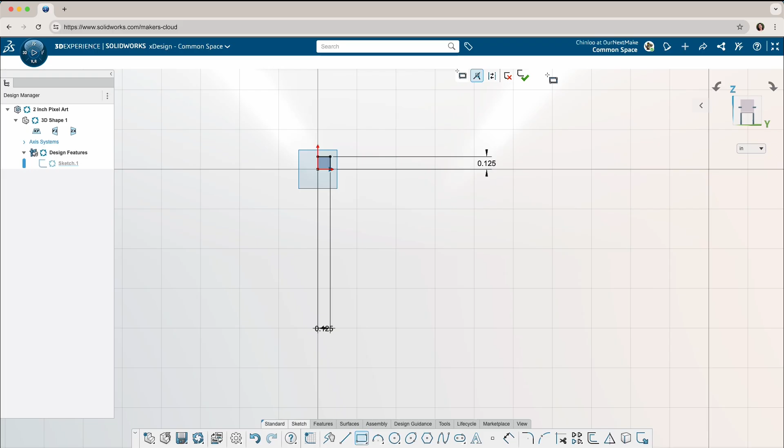I begin by making the first pixel block. I sketch a small 1/8 inch square. Then under the Features tab, I choose to extrude the square into a cube.

Now I can create a grid of blocks using the linear pattern feature. I adjust the spacing to keep the blocks tight together. 16 rows by 16 columns will make a perfect base plate.

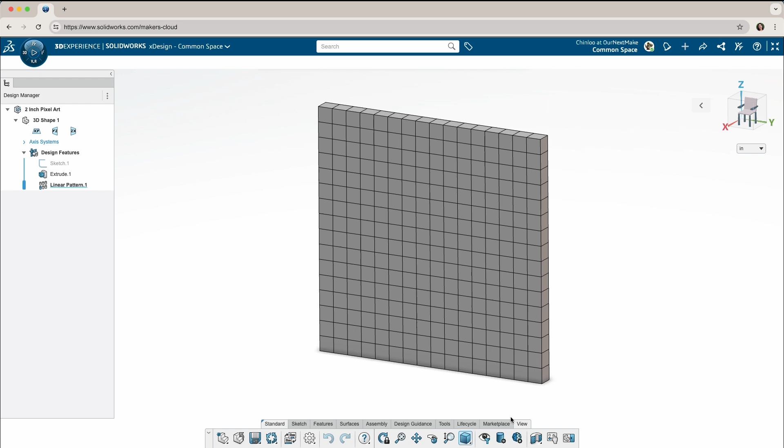Finally, I make sure to switch to body selection and uncheck Merge Results to keep each block separate so I can apply the colors on individual blocks.

From this 16 by 16 plate, you can either save a copy or make a revision of the original model. This way we can change things up and not affect the original 16 by 16 plate.

To get the pixel character shape, I open up the linear pattern dialog by double-clicking the feature in the Design Manager tree. At the bottom of the dialog, I expand the Advanced section and check the Skip Instances option.

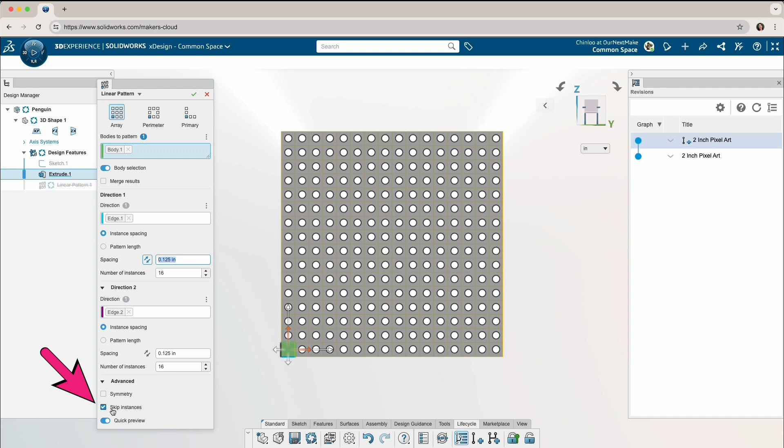Now you can toggle the dots in each block to turn it on or off to get your shape.

With the shape set, I turn on Color under the Tools tab of the action bar at the bottom of the screen. I select the faces I want to color and pick the color I want.

Now I can get a sense of what I'm looking for in the design.

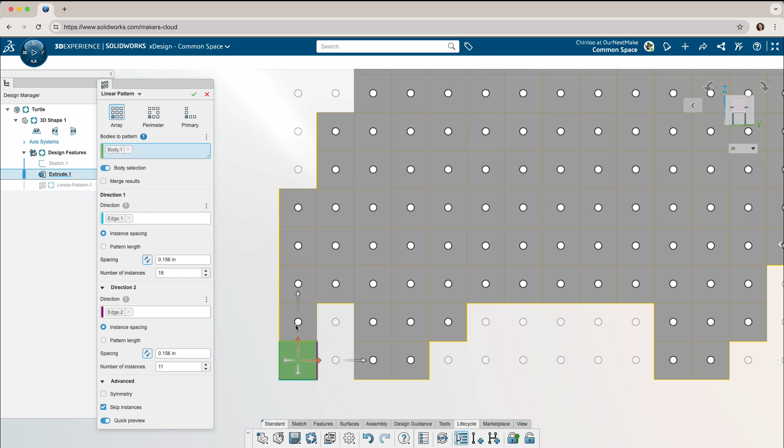If your shape doesn't include the original corner block, there's a trick to addressing this. The corner block is necessary to maintain the pattern, so it can't be toggled off.

However, I can go to the Features tab and choose the Delete Body tool to remove that unwanted block after the pattern is made. Ta-da!

Now, if you are not able to 3D print in color, I have an idea for how you can add color after the shape is printed.

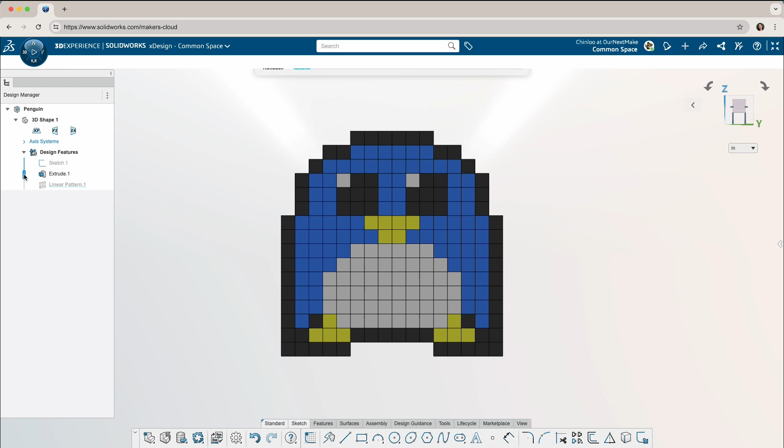I roll back the design before the pattern and add another extrusion. I choose the original sketch of the square, change from a solid to a thin extrusion to make a border wall for each pixel block.

I check the layer height and line width of the printer to make sure my geometry is not too small for the filament head. Then flip the extrusion to make sure it's growing outward.

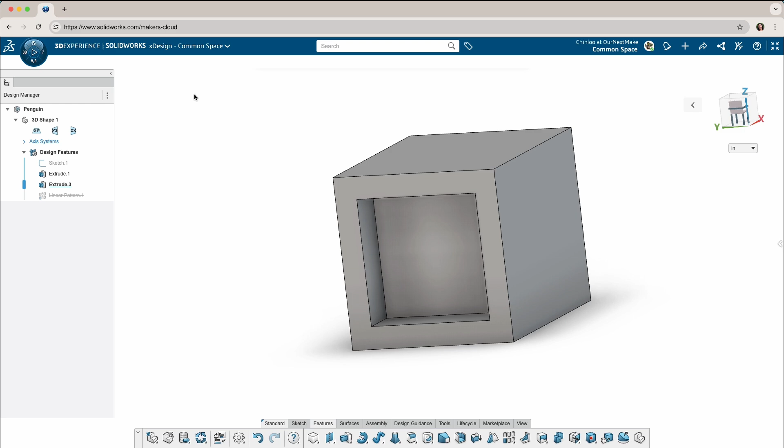Once I roll back after the pattern, I see that there's now a waffle-like pattern outlining each pixel block. I export the model as a step file to use in the Bambu Studio app. I reapply with colors using those in the printer and wait for the results.

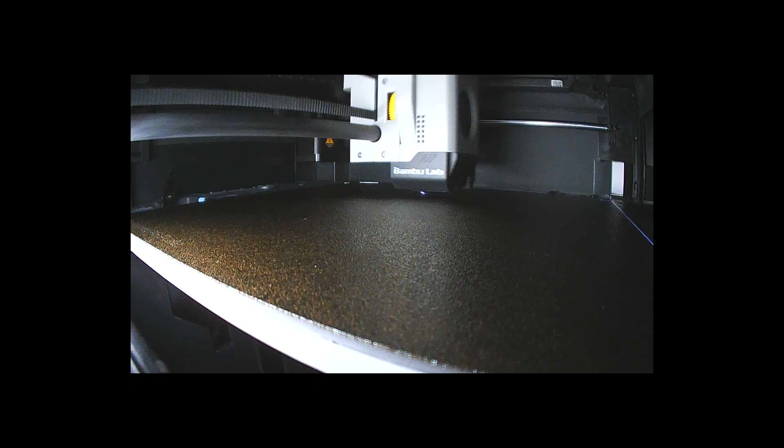For single color prints, we have this waffle grid. We can use it to catch color from markers, paint, or even nail polish. The nail polish acts like a resin, filling in all the divots. The final finish is quite shiny and jewel-like.

Looks great. This will make a great decoration.

I hope this project eased you into the world of computer-aided design, or CAD.